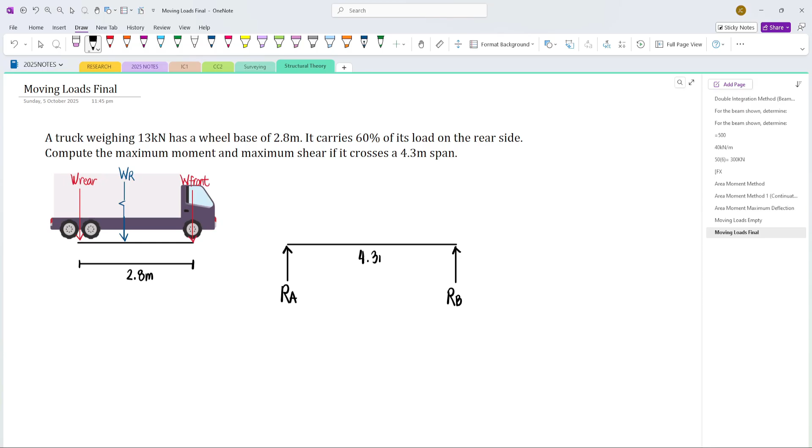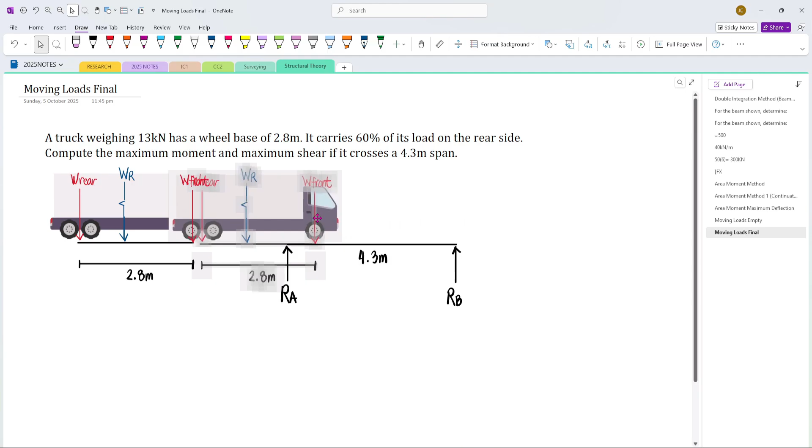So, as this truck passes along the span, mag-iiba yung maximum moments, yung shear saka maximum moment as it moves along the span. So we want to compute kung ano yung maximum or critical na moment if it crosses the span. Actually, yung concept nito is galing sa differential calculus. We have discussed it in another video, tried to solve moving loads problems using calculus, differential calculus, the concept of maxima minima.

So, yung binigay sa atin is the total weight of the truck, which is 13 kilonewtons. Itong 13 kilonewton load, this will essentially be the resultant. Lagay natin equals 13 kilonewtons. Then we have our rear load and the front load.

So 60% is carried by the rear side. So ano yung 60% ng 13? 0.6 times 13, we have 7.8. So on the rear side, we have 7.8 kilonewtons.

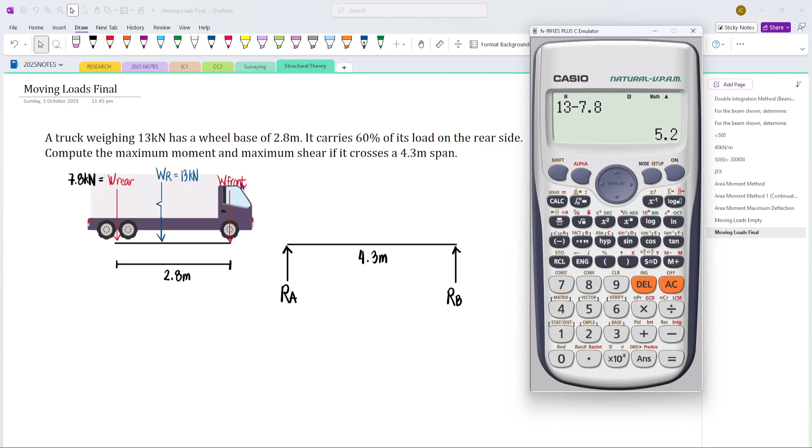So for the front side, it would be 40% lang, or essentially, 13 kN, the resultant, minus the rear load, yan yung maging load dyan sa front. So this is 5.2 lang, 5.2 kilonewtons.

Ayan, so at this point, hindi pa natin alam kung saan mag-a-act yung resultant load natin. But naturally, this will act closer to the rear side since mas malaki yung load dyan, 7.8 kesa sa front load. Again, 7.8 plus 5.2, yan lang yung 13 kN.

Yung binigay lang sa atin is initially ang resultant, so yung sinolve natin are the actual components. Ngayon, let's try to solve this distance, denoted as bar x. Now we can compute bar x using Varignon's theorem.

So resultant 13 multiplied by bar x is equal to, let's say ito yung reference line natin, reference line from the rear. So 13 times bar x equals the sum of the effects of the rear load and the front load.

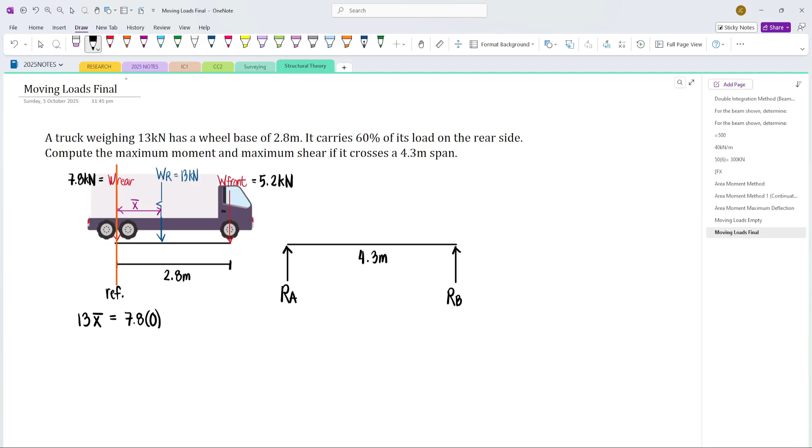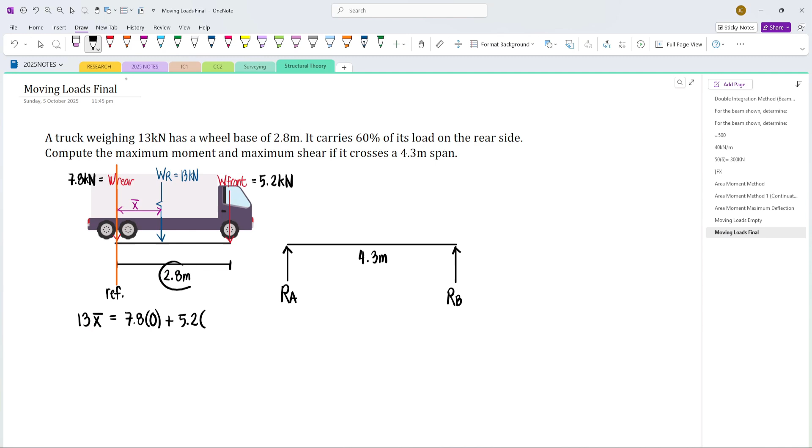So for the 7.8 kilonewton load, this is exactly at the reference point or the reference line, so this is to be multiplied by 0. Then for the 5.2 kN load, we have plus 5.2 times the distance going to the reference axis, which is 2.8 meters. So solving bar x, we have 1.12 meters.

So di ba sa concept natin, essentially dalawa yung maximum moments na mako-compute natin. First is the maximum moment under the 7.8 kilonewton load, and the second one is the maximum moment considering the front load. Now, where do we situate the loadings to cause the maximum moment about the rear load and the front load? Yung concept natin dyan from the derivation of moving loads is hahanapin natin yung gitna ng resultant and the load of interest. Then yung gitna na yan, ilalagay natin sa midspan ng beam.

So for example, if we want the maximum moment under the 7.8 kilonewton load, then draw tayo ng line dyan, tapos hahanapin natin yung gitna. So from the resultant and the 7.8 kilonewton load, the center is located dito.

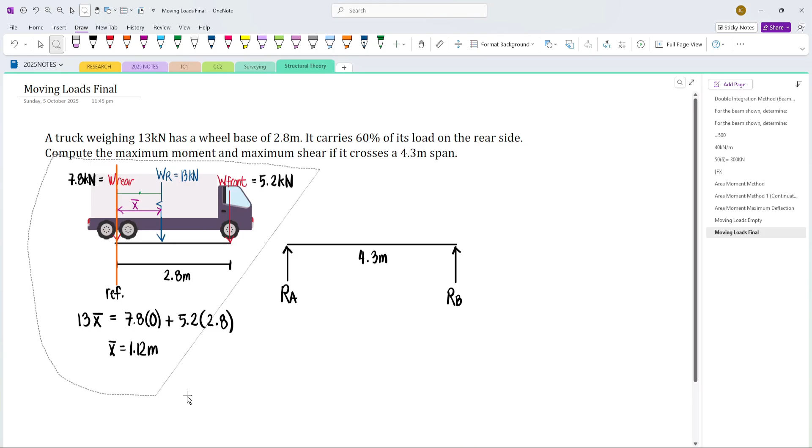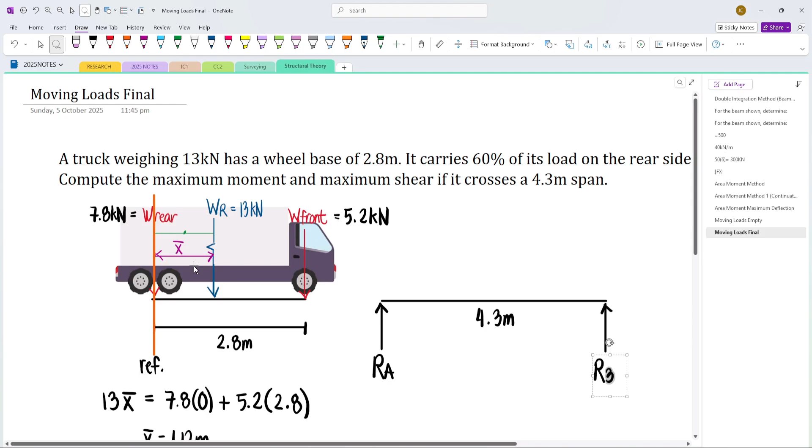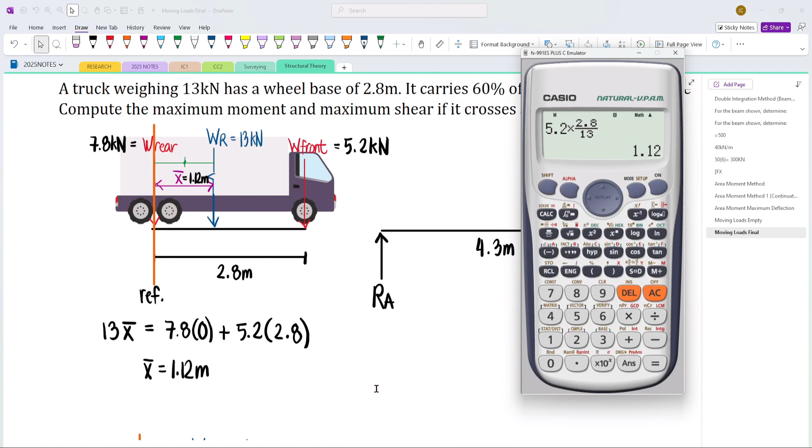So duplicate na lang natin yung figure natin para sa isang moment naman. So yung gitna na yan, ito, if bar x is 1.12 meters, then half of that distance would be equal to 1.12 over 2, which is divided by 2, we have 0.56. So 0.56 dito sa left side, then another 0.56 dyan sa right side.

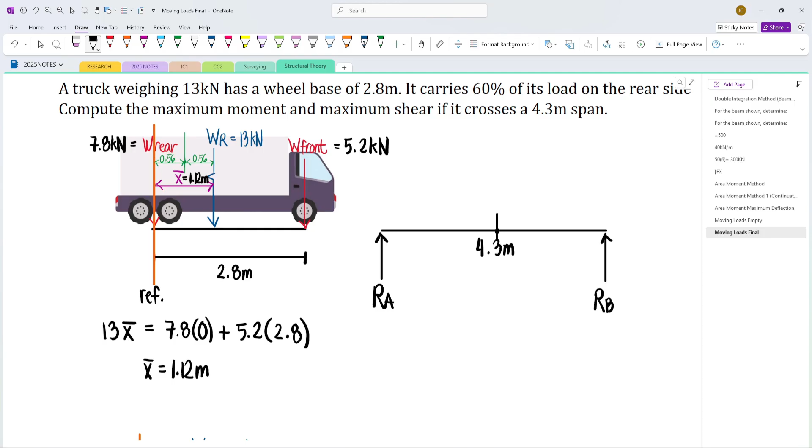Yung gitna na yan, ito, yung center ng resultant saka load of interest natin, ilalagay natin sa midspan ng beam. So, yung midspan ng beam na yan is located, let's say, dito. We will denote this as the center line, C sub L.

Ngayon, we have to make sure that the green line would be aligned to the center line of the beam. So, yung green line na yan, i-align natin sa center line. Ito. Ito yung center line.

Now, yung next natin gagawin is we have to determine if some of the loads would be outside the span, because if it's outside the span, then it won't affect our maximum moment since it will be supported somewhere beyond the supports of the bridge or the span. So, how can we determine if any of the loads would be outside the span?

Ito yung gagawin natin. Diba ito yung center line ng beam? Essentially, yan yung midspan niya. So, if we draw a line from the center line going to point B, then this distance will be half of 4.3 meters. Yung kalahati ng 4.3 is 2.15.

And then we have to compare this sa kung ano yung distance from this green line, yung center ng rear saka resultant, ayan, going to the front load. So, di ba, this is 0.56. Then, alam natin na yung wheelbase is 2.8 meters. Ito. 2.8 meters yan. So, essentially, 2.8 minus 0.56 would be this remaining distance.

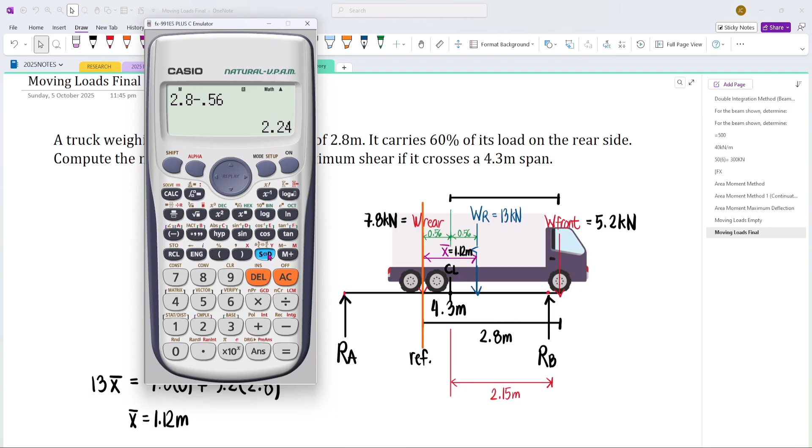So, we have 2.8 minus 0.56. This is equal to 2.24. 2.24 meters. Ayan. So, notice na tama yung figure natin.

Merong portion na lalagpas sa point B. Kasi 2.24 yan, ito naman 2.15. So, what does it mean? Merong excess distance, so yung front load is already outside the span. So, it won't affect the maximum moment, essentially.

So, sir, ano yung gagawin if this is the case? Now, if this is the case kasi, yung front load will not affect the reaction at A as well as the reaction at B since this is already outside the span. So, let's try now to compute the maximum moment considering this configuration.

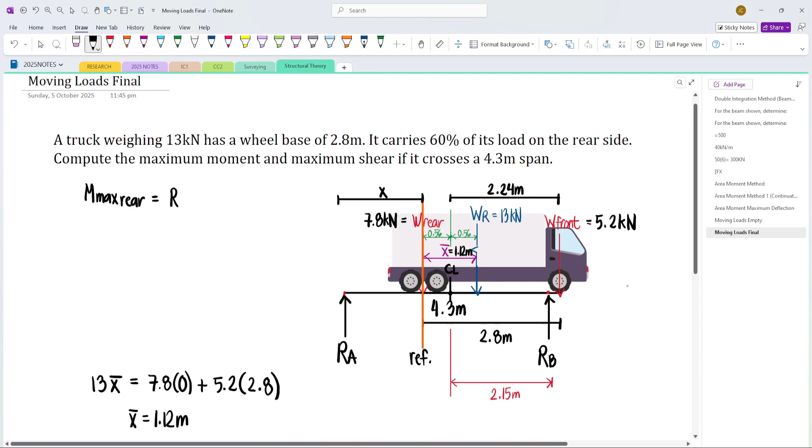Diba, to do that, to compute the maximum moment under the rear load, we have to compute RA first. Then, RA multiplied by this distance, let's say this is X. RA times X, yan yung moment under the rear load. So, we have RA multiplied by X. So, solve down natin yung RA considering this figure.

Summation of moments about point B tayo. Ayan. By the way, how did you assume, sir, na yung front load is outside?

Again, itong distance yung ginamit natin. But skinale ko kasi yung figure ng truck so that the distance will be accurate. Accurate talaga. So, kaya yung minove ko siya, automatic yung front load, lumagpas siya sa point B since nakascale yung figure natin. But if hindi siya nakascale, you have to check using the distance. Again, 2.24 exceeds 2.15 meters. So, that's how we can assure na yung front load is outside the span.

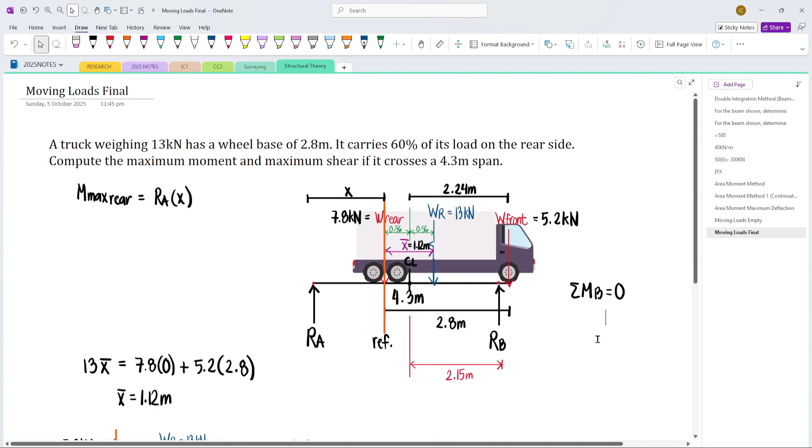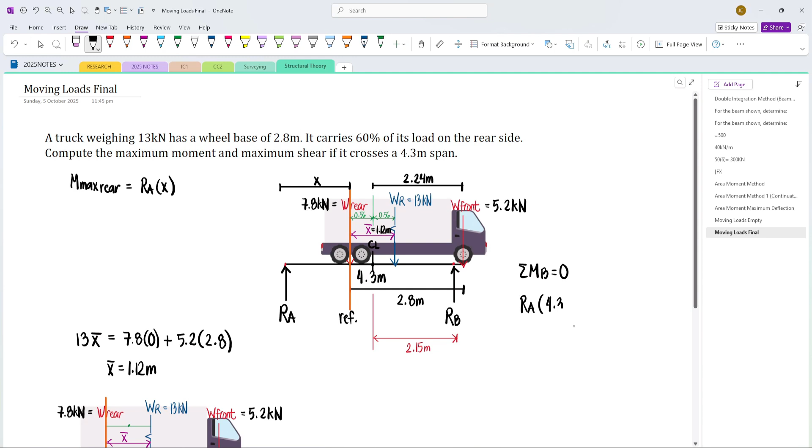So, moment tayo sa point B, we have RA multiplied by 4.3 meters. Ayan. Then, since yung front load is lagpas na siya sa span, we have to use the rear load sa calculation natin, yung rear load lang, 'di ba?

Nakasanayan natin na if merong two wheel loads, then we just use the resultant to solve the reactions. But in here, we cannot use the resultant since yung front load is again lagpas na sa point B natin. So considering only the rear load, we have minus 7.8. This will cause a counterclockwise rotation about point B.

Then ano yung distance na yan? Ito. From the rear load going to point B. 'Di ba? Yung distance na yan magiging 2.15 yan, yung kalahati ng span. So 2.15 plus 0.56, yan yung distance na yan. So 2.15 plus 0.56 is 2.71 meters.

Ayan. So times 2.71 equals 0. So yung value ng RA is equal to 4.3x minus 7.8 times 2.71. Then equate natin to 0. So solving RA, we have 4.9158.

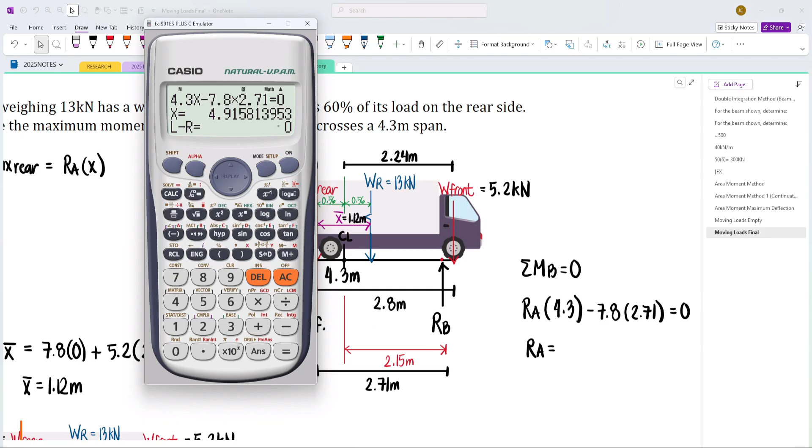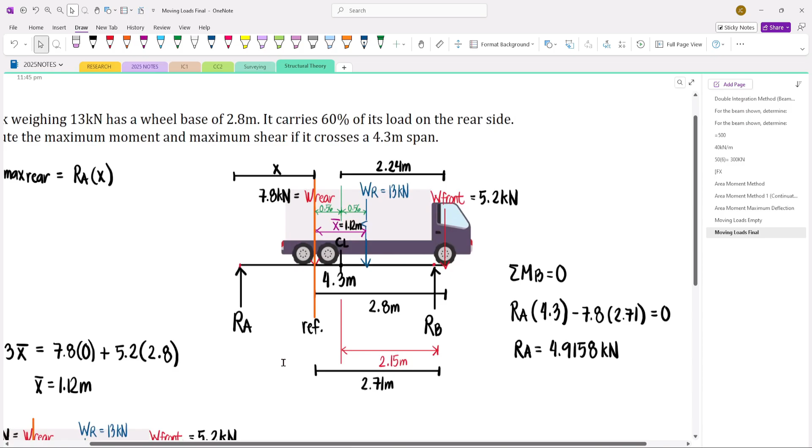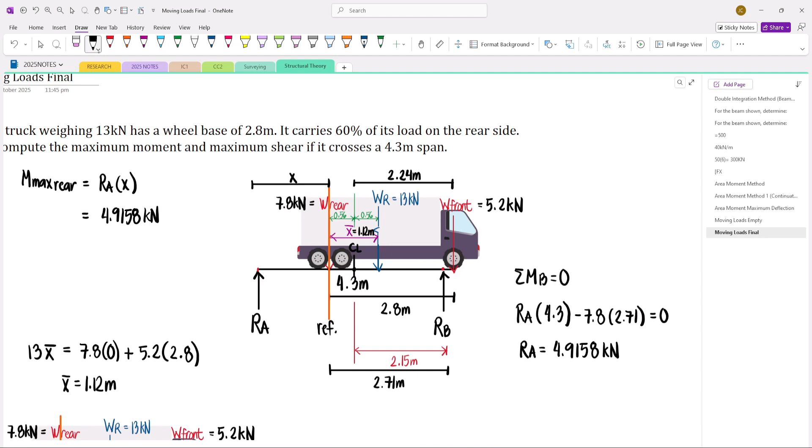This is kilonewtons. So solving the maximum moment under the rear load, considering this configuration lang, again, magbabago yung solution natin essentially. But this is just for the purpose of demonstration. So RA equals 4.9158 kN. Then this distance x is equal to, 'di ba, itong kalahati ng beam, if this is 2.15, then this is also 2.15.

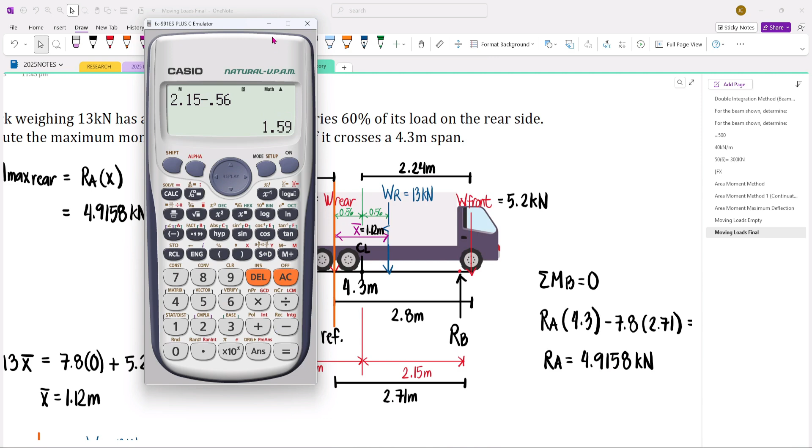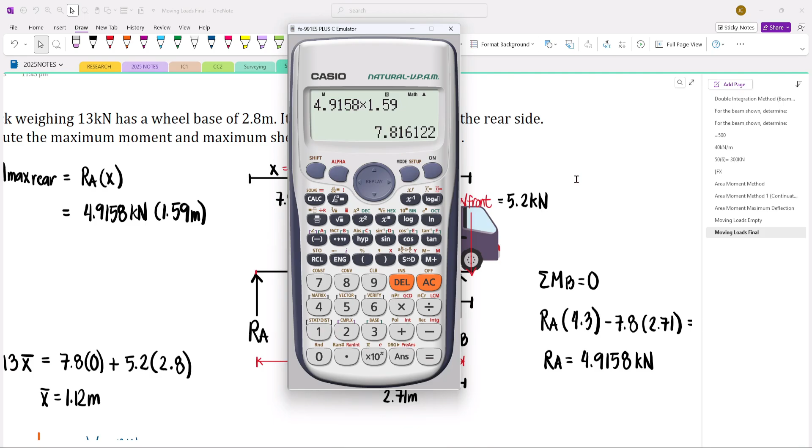So 2.15 minus 0.56, yan yung value ng x. So ano yan? Minus 0.56, we have 1.59. So times 1.59 meters. So this will give us 7.816 kilonewton meter.

Ayan. But again, this is the incorrect answer. Bakit? Since alam natin na yung front load is already outside the span, then this configuration will not cause the maximum moment under the rear load. So sir, ano yung gagawin if this is the case?

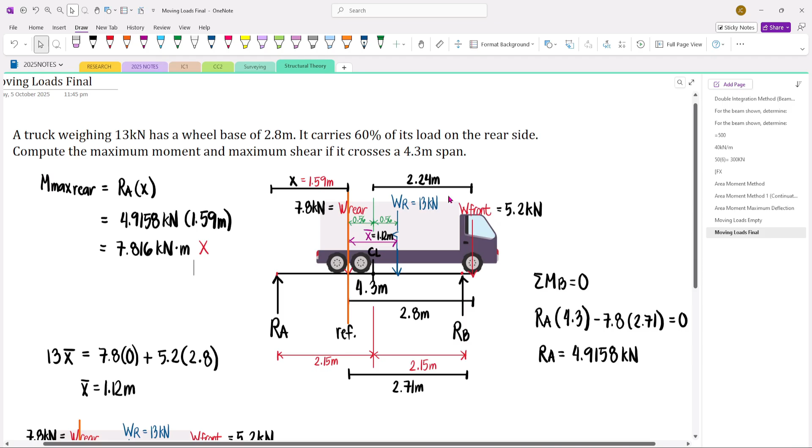Yung gagawin natin is, since yung front load already outside the span na siya, then we have to reduce the problem into one moving load na lang. Bale, ito yung mangyayari.

Copy natin to. Copy natin yan ulit. Then, ito yung truck natin.

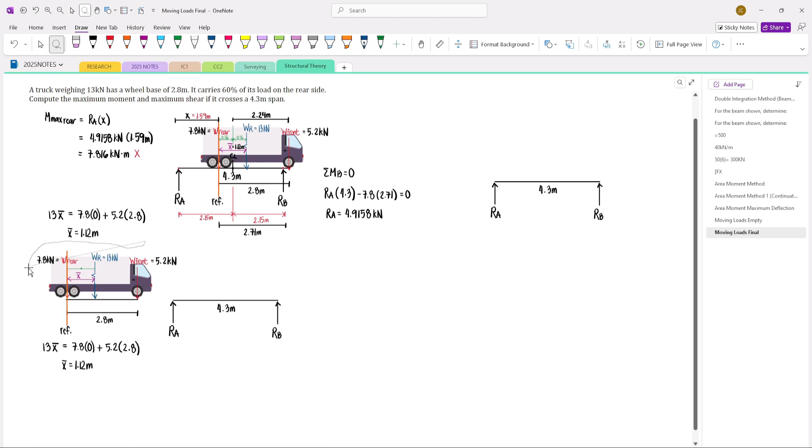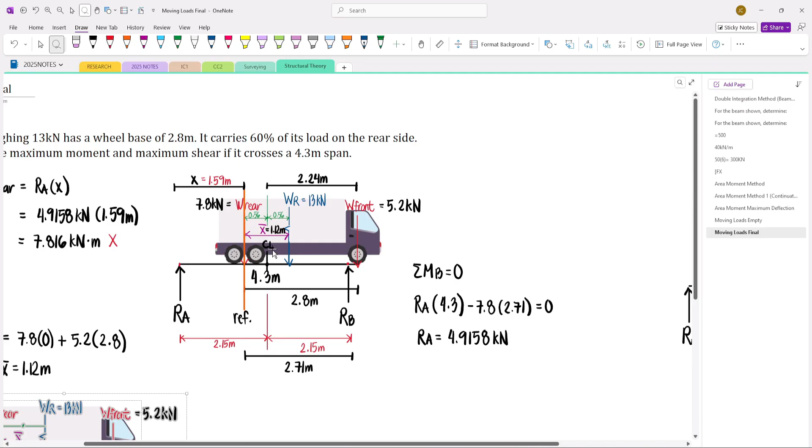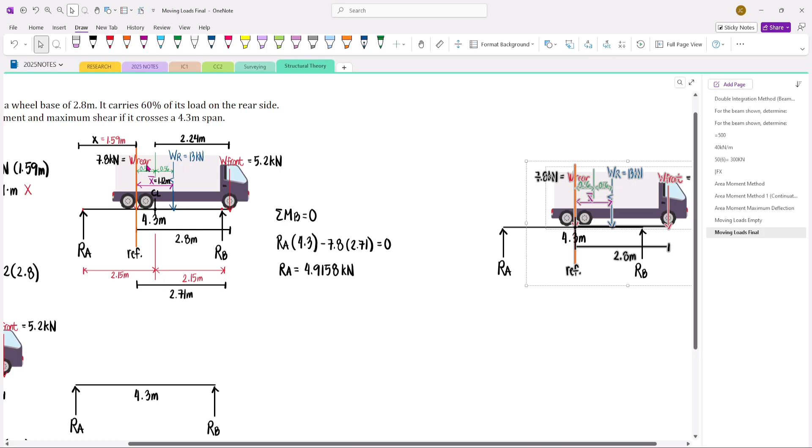Since alam natin na yung front load is already outside with this configuration, if the truck moves slightly to the right, then there will come a point na yung rear load is already aligned sa center line ng beam. So by our concept, yung gitna na yan, ilalagay natin sa center line ng beam. But again, this will not cause the maximum moment because if this moves forward, there will come a point na yung rear load is andyan talaga sa mid-span. Since we know na dito pa lang, the load is already outside the span, then we only consider the rear load.

So ano yung mangyari kapag ito na yung figure? Yung mangyari dyan, isang load na lang yung i-consider natin. So we have RA here, then we have also RB. Since this is outside the span, all the more it will be outside the span if the truck moves slightly to the right, then yung load na i-consider na lang natin is ito na lang, yung W rear.

So it will be located at the mid-span. So this is 2.15 meters, ito rin, 2.15 meters. So we have here 7.8 kilonewtons. So ngayon, yung maximum moment would be located andyan sa gitna, exactly.

Now, di ba meron tayong formula for concentrated loads located sa midspan. If this is P, then yung reactions natin would be P over 2 sa dalawang sides, kalahati ng P, since symmetrical yung placement ng load. So yung distance niyan is also half ng L over 2, yung dalawang distances. So the moment here is equal to moment at midspan, is P over 2 load times the moment arm, L over 2. So this would be equal to PL over 4.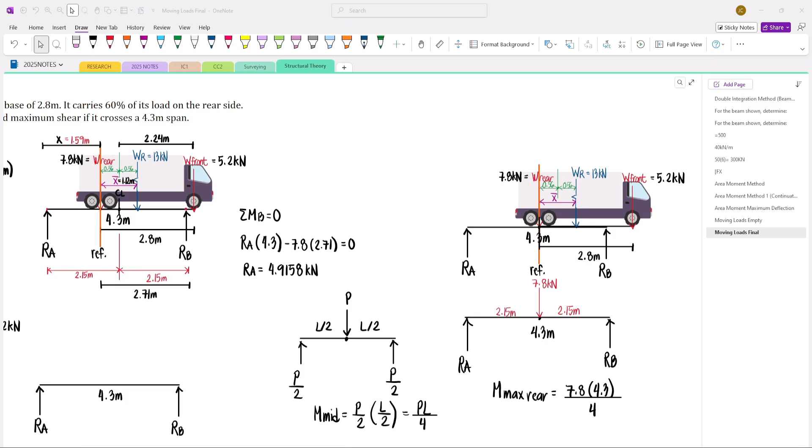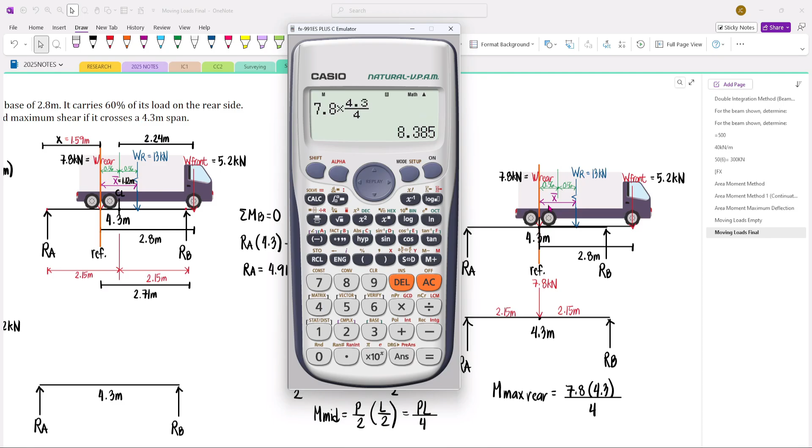So if you have a two moving loads problem, then merong isang load na outside the span, then we will reduce the problem into a one moving load problem, then we can readily apply this formula, PL over 4. So yung maximum moment pala under the 7.8 kilonewton load or the rear load na lang, M max rear, we have 7.8 times L. L is equal to 4.3 meters, then divided by 4. 7.8 times 4.3, then divide natin by 4, equals 8.385. Then this is in kilonewton meter.

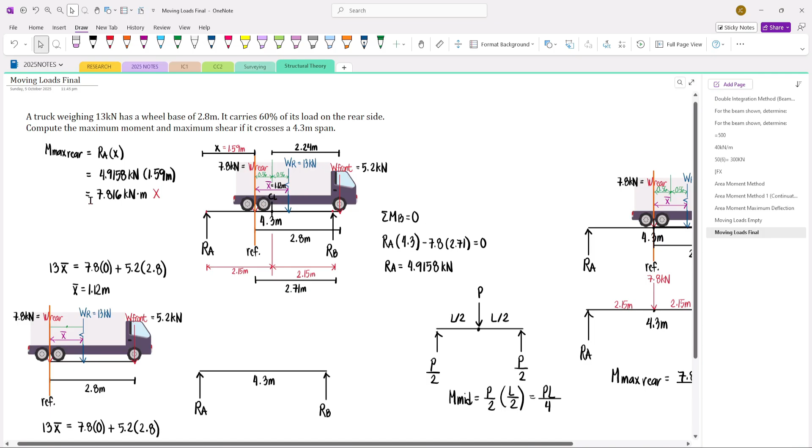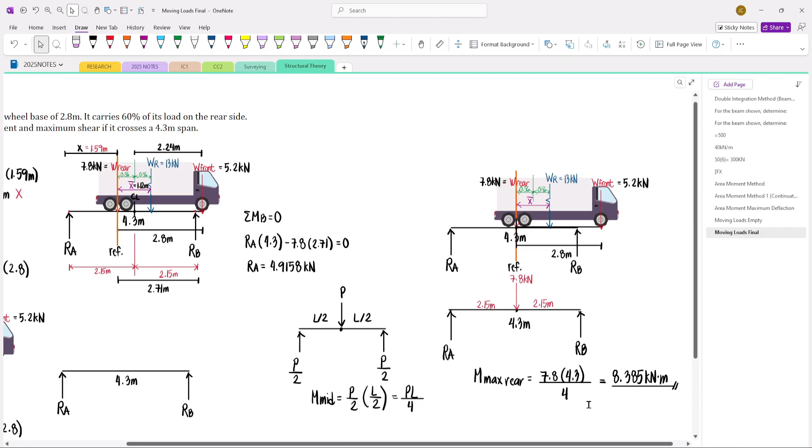So di ba merong slight difference? Kanina, yung na-solve natin 7.816 by our concept. But again, since using the concept, yung front load is outside the span, then we have to use this one. Ito yung maximum moment under the rear load. But we're still not sure if ito talaga yung maximum moment na i-consider natin, since we also have to compute the maximum moment considering the front load.

So for the front load naman, yung gagawin natin is hahanapin natin yung gitna ng resultant sa front load. Di ba yung bar X is 1.12 meters. So this remaining distance would be 2.8 minus 1.12, which is 1.68 meters yung buong distance niyan. Dito ko na lang ilalagay, so yung gitna niyan is located dito. Then half of 1.68 is equal to 0.84. So 0.84 dyan, tapos dito rin, 0.84.

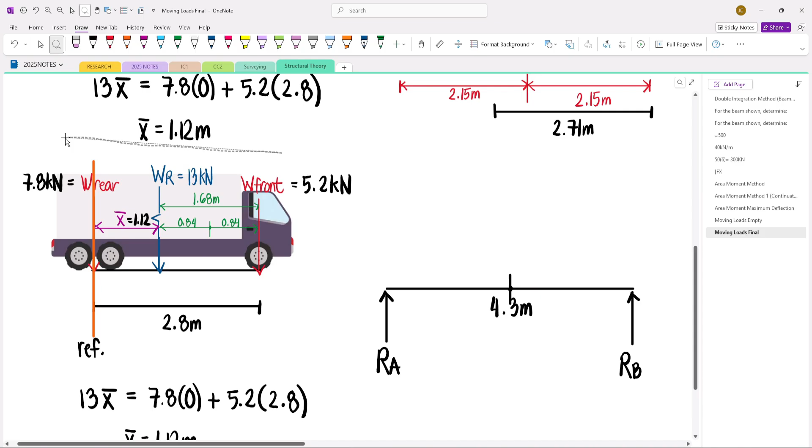So yung gagawin natin is establish natin yung center line ng beam or yung midspan niya. Tapos ilalagay natin yung center ng front load saka resultant load dyan sa midspan. So we would have this figure. Lagay natin yung gitna niya sa midspan. Andyan na yan sa center line, C sub L. So now we have to determine if meron bang load na lumagpas sa span ng beam o wala.

Again, ito yung RA. Now looking at our figure, since naka-scale yan, alam natin na yung rear load is just within the span since it is slightly to the right of point A. Ito kasi yung point A, location ng RA saka RB. But in order to determine without scaling, then kukunin natin yung distance. Diba yung kalahati ng 4.3 is ito.

Again, this is 2.15 meters. Let's try to calculate this distance. We have 1.12 plus 0.84 going to the center line. 1.12 plus 0.84 gives us 1.96. So going to the center line is only 1.96 meters, which is lesser than 2.15.

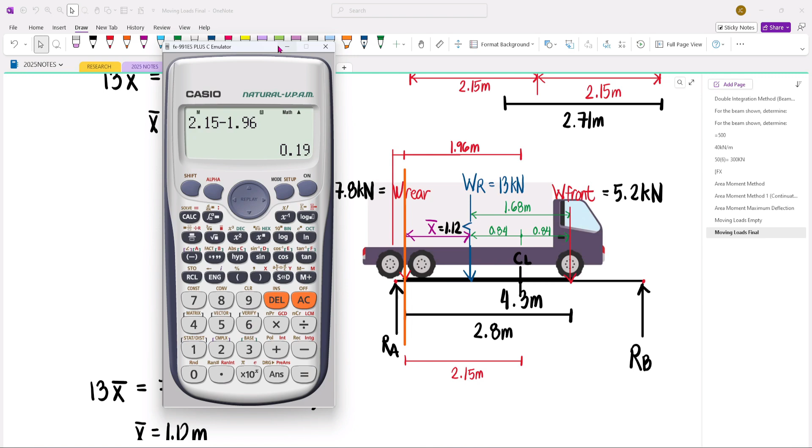But that's not necessary in our calculation, since to solve the maximum moment under the front load, it's better if we just take RB, then we will take moments from the right. So the maximum moment under the front load, Mmax front, would be equal to RB multiplied by this distance, the moment arm going to the front load.

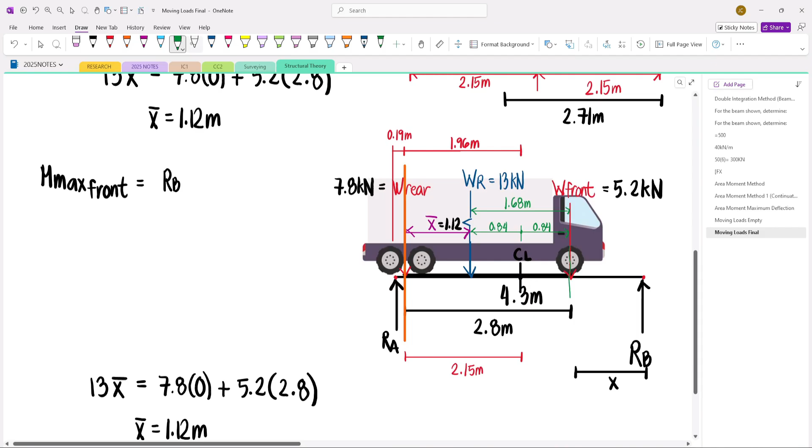Let's call it X. Now this is what you should remember: if you are cutting from the right, with the origin from the right, and we isolate that point, then the resulting internal moment would be clockwise. This is due to the positive effect, the moment under the front load. Why clockwise? For positive bending to occur, the applied moments at the ends would be clockwise on the left side, and counterclockwise on the right side, so that the bending orientation becomes like a smile.

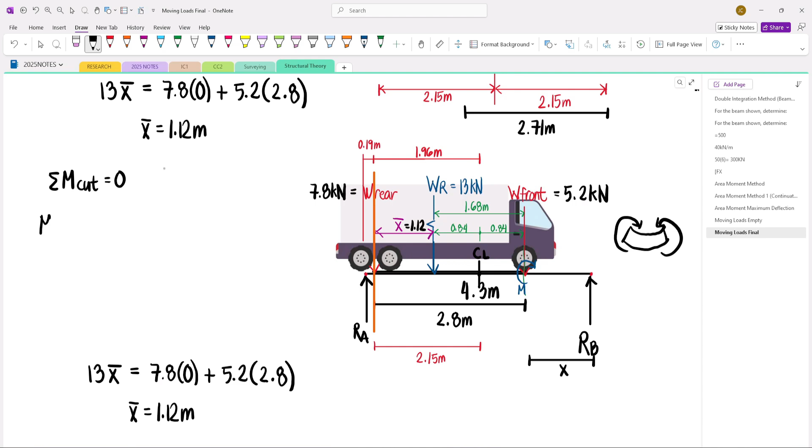So if our origin is from the right side, and we isolate what's on the left side, then the resulting moment is clockwise. So if we sum up, the Mmax front solution is like this: summation of moments about the cut equals 0. So the M there is Mmax front. I'll just place Mmax front, positive since clockwise is our assumption.

Then the RB, the rotation it will cause about this point, is counterclockwise, right? That's the direction. So minus RB multiplied by X. Notice that although this causes a counterclockwise moment about the point, once we move this to the other side of the equation, it becomes positive. So Mmax front will just be a positive value, not a negative value.

Now here, our cut is from the left, so the resulting moment is essentially counterclockwise. When counterclockwise, you can equate it right away: RA times X minus M. Since that's counterclockwise, you can move minus M to the other side of the equation, so it becomes positive.

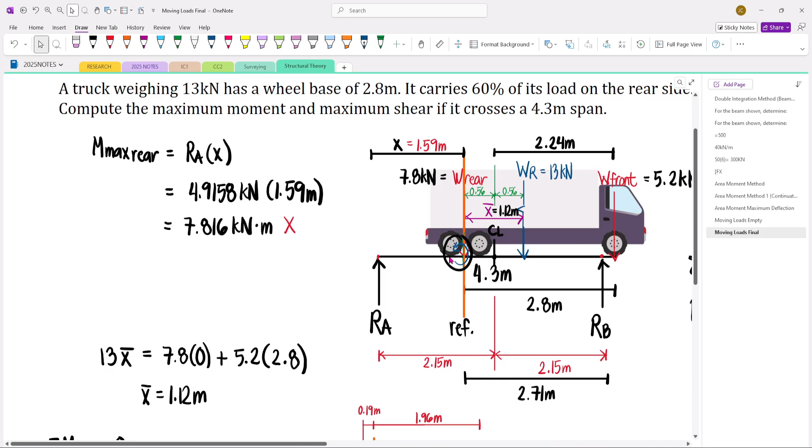So let's solve RB. Since all the loads are included, the rear load and the front load, to solve the reaction we will just use the resultant. We can use the resultant if all the loads are within the span. So to solve RB, let's take moments at point A equal to 0. We have 13 kN times its moment arm going to point A, which is this distance.

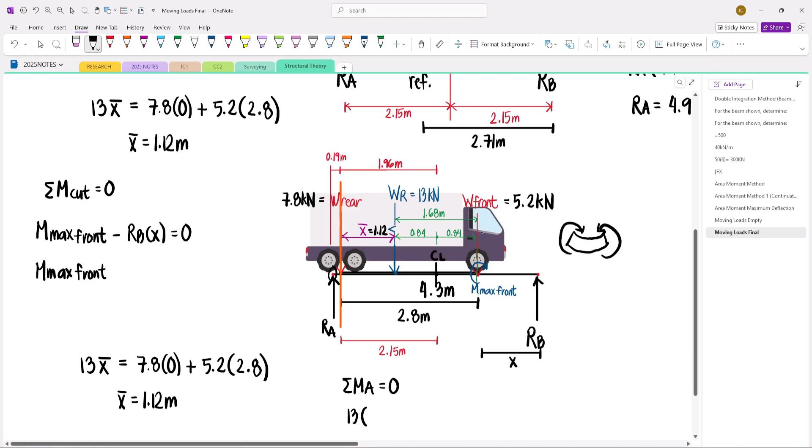So what is that distance? Is it this one? That's 2.15. Wait, there's something wrong with our figure. 2.15 is going to RA. Right, this is 2.15. Then this is the resultant load.

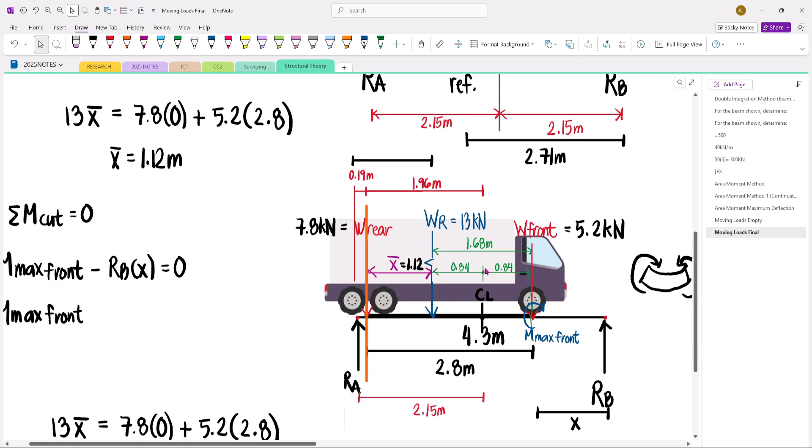So 2.15 minus 0.84, that's the moment arm going to point A. That's 2.15 minus this, 0.84. So 13 times 2.15 minus 0.84, that's a clockwise moment about point A.

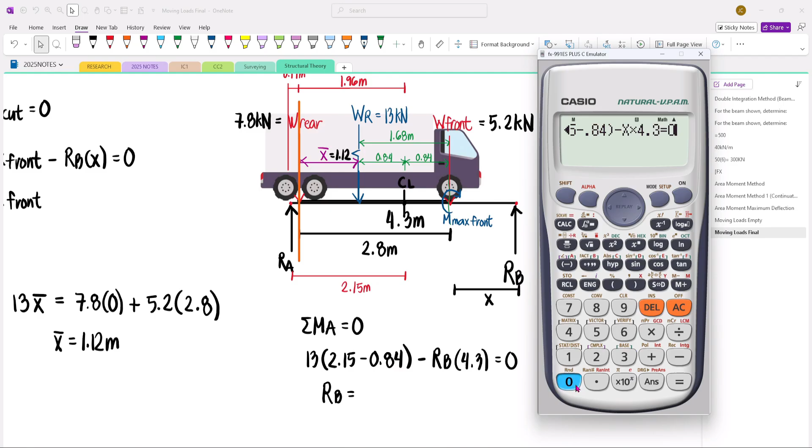Then we have RB minus RB times 4.3 meters going to point A. Then let's equate it to 0, so we can solve for RB. 13 times 2.15 minus 0.84 minus RB times 4.3 equals 0. So we would get 3.96, in kilonewtons.

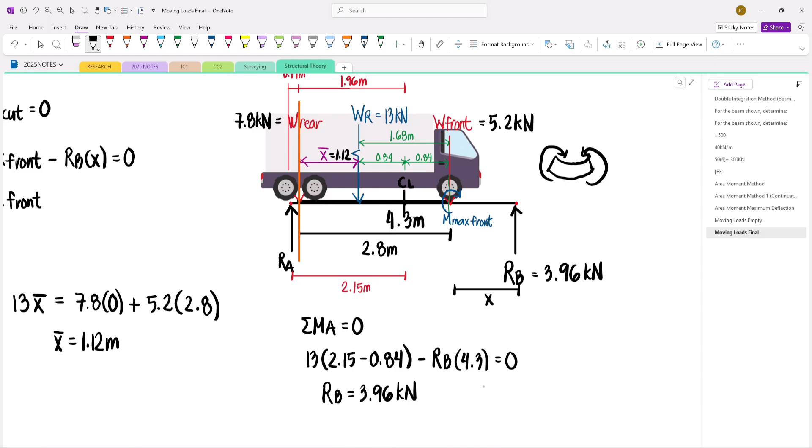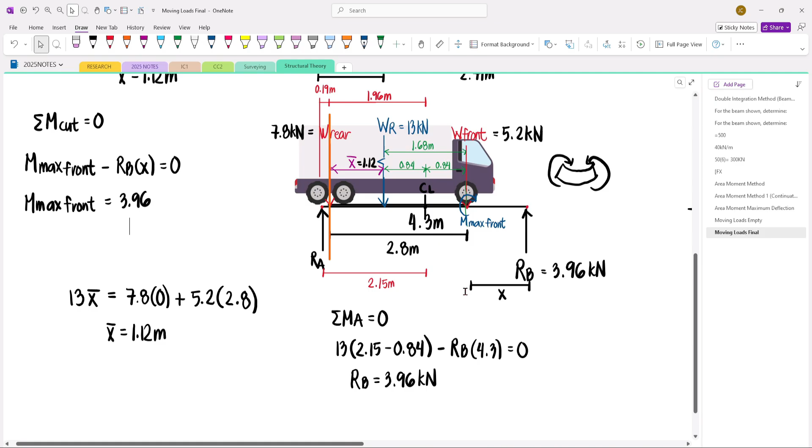So now let's take moments about the cut, just Mmax front. Let's move RB times X to the right side of the equation. RB is 3.96, then this distance X is equal to 2.15 minus 0.84, again this is also equal to 2.15. So 2.15 minus this, 0.84, that's the remaining distance X, so times 2.15 minus 0.84.

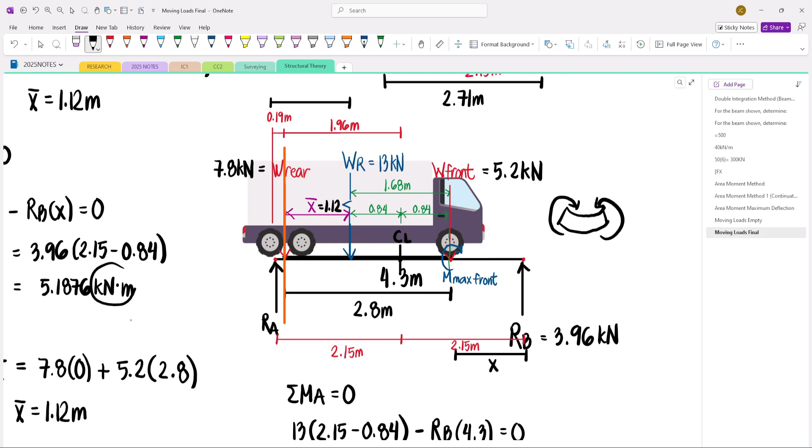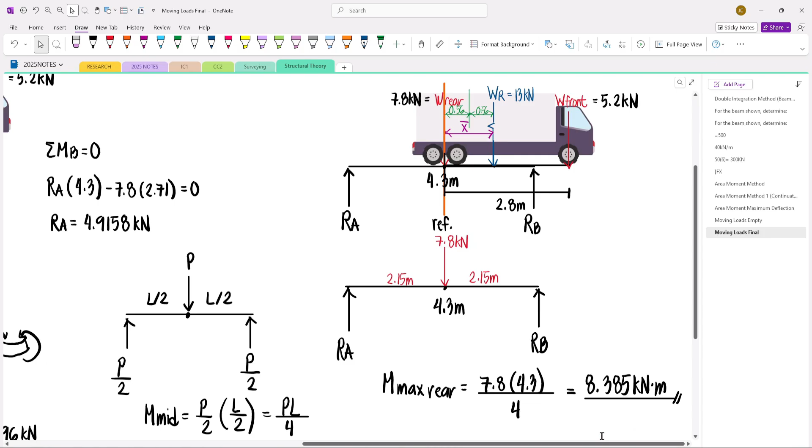So this will give us 5.1876, in kilonewton meter. So if we compare, the maximum moment under the 7.8 kilonewton load is 8.385. Under the front load, we have 5.1876. So the greater moment is 8.385, so that's our answer.

So again, in this problem, you cannot apply the formula PL minus PS times D squared divided by 4PL, which gives us the maximum moment. Why? We cannot apply this formula since, considering the larger load, the 7.8, the front load is outside the span. So whatever value this is, it won't give us 8.385. This is a key consideration.

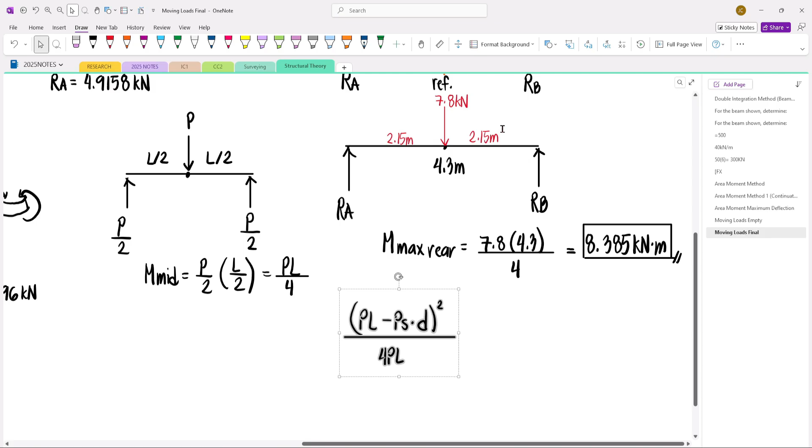That's why, when solving problems involving moving loads, it's better to understand the concept. But again, in the board exam, you can just readily apply this formula since the spans used are large, usually 25 meters, and the wheelbase is usually just 4.3 meters, so all the loads fit. But since in undergrad we want to learn the concepts and basics, we learn how to solve this using the concept of maxima-minima and the generalized figures. So that's our answer for the maximum moment.

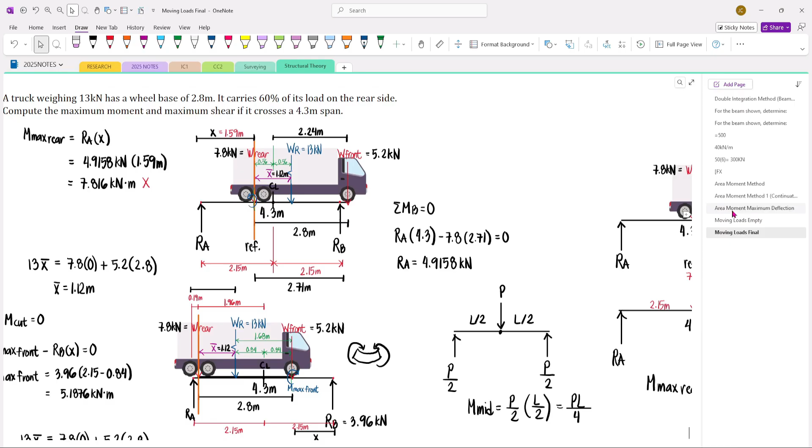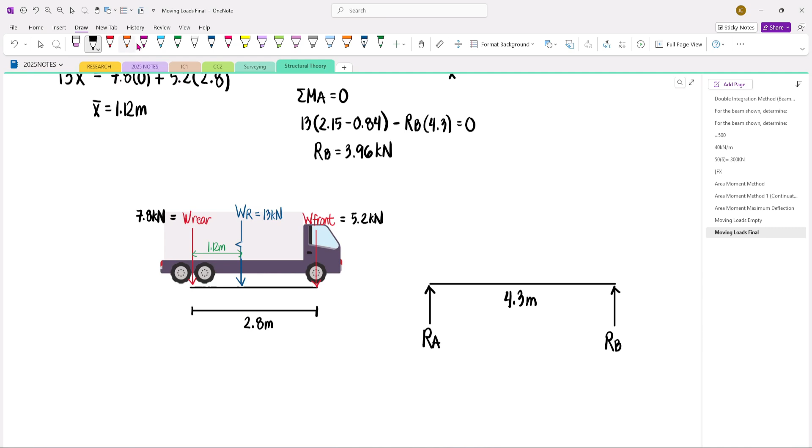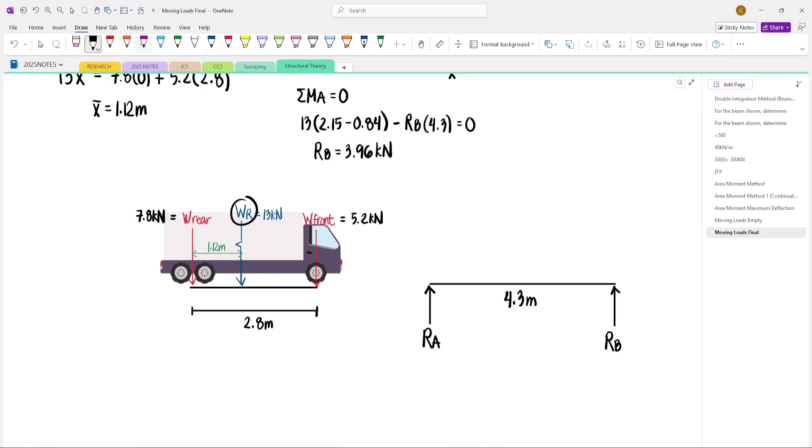Next, if we want to calculate the maximum shear, here's what we do. We find where the extreme load closest to the resultant is. Now what does extreme mean? An extreme load is the one at the very end. So for two-wheel loads, we have a rear load and a front load. In our figure, the resultant is closer to the rear load, since that's 1.12, while the other side is 1.68. So once you identify the closest extreme load from the resultant load, that load will be placed exactly at the support.

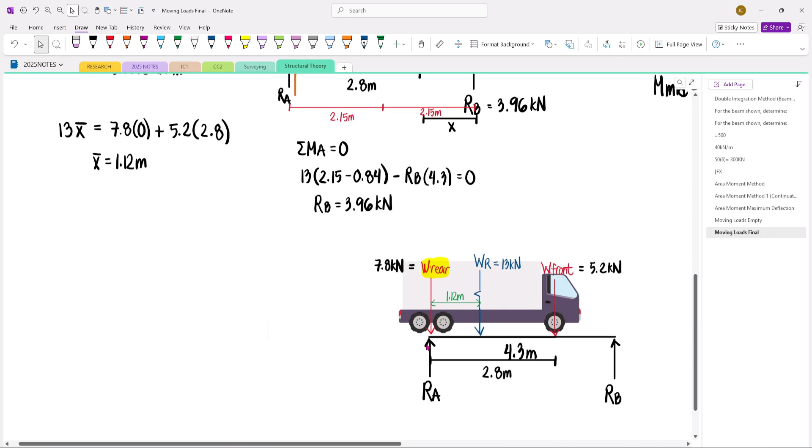This load is on the left side, meaning we place it at the left support. That's what happens. Then, once we place the load exactly at the support, to solve the maximum shear, we just compute the reaction where the extreme load was placed. So to solve RA, we can sum up moments about point B.

We will just use the resultant since all our loads fit within the span. So once we take moments about point B, we get this distance. I hope we agree that this remaining distance would be 4.3 minus 1.12. So, taking moments about point B, we have RA times a moment arm of 4.3 meters going to point B, minus 13 kN, using the resultant, times a moment arm of 4.3 minus 1.12. We equate this to zero and solve for RA.

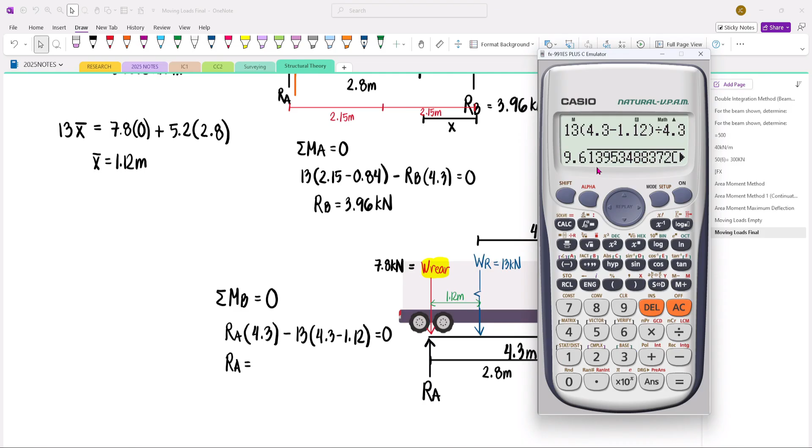So RA equals 13 times 4.3 minus 1.12, divided by 4.3. So we get 9.614 kilonewtons.

So sir, what if there are 3 moving loads? Let's say three moving loads, then we have the following figure. Let's say we have three loads, and the resultant is somewhere here, with a distance going to the left and also a distance going to the right end. These are the extreme loads, these two. Notice in our figure that the resultant is clearly closer to the right load. So what we do is place that right load at the support.

But what if the resultant is here instead? Let's say the resultant is at this point. What happens then is the resultant is closer to the load at the left extreme end. So that load is what you place at the support. Same as what happened before, since the resultant is closer to the left extreme side, that load is the one we place exactly at the support.

But again, this is at a differential distance x from point A, because when you draw the shear and moment diagram, the W rear and RA are essentially counteracting loads, downward and upward. So the shear at that point would not be equal to this value, the 9.614. To demonstrate this, we can model the beam here.

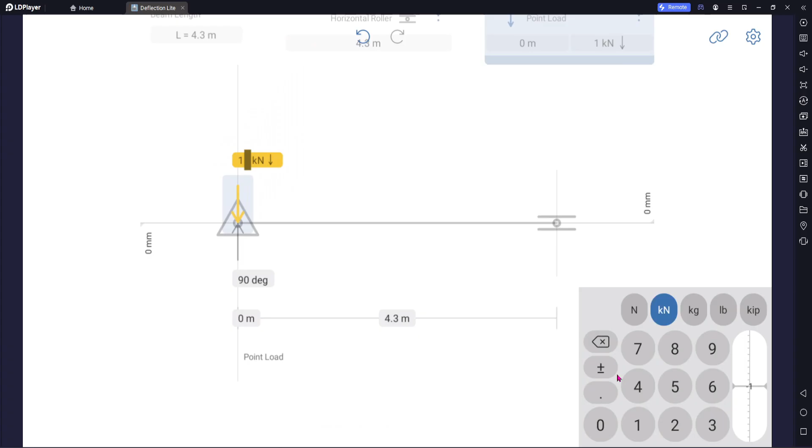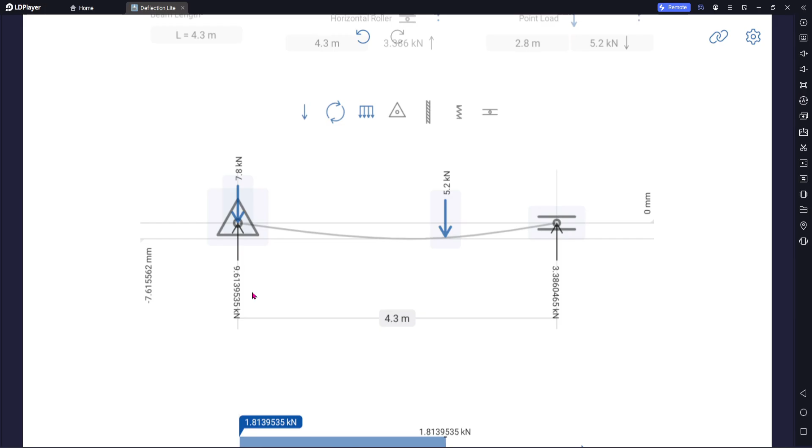So we have a span of 4.3 meters, simply supported. When we place the load, this is 7.8, at 2.8 meters from the left. This other one is 5.2 kN. So our resulting reaction is 9.6139, which is what we got earlier, 9.614. But if you try to look at the shear diagram, it will just be 1.8139.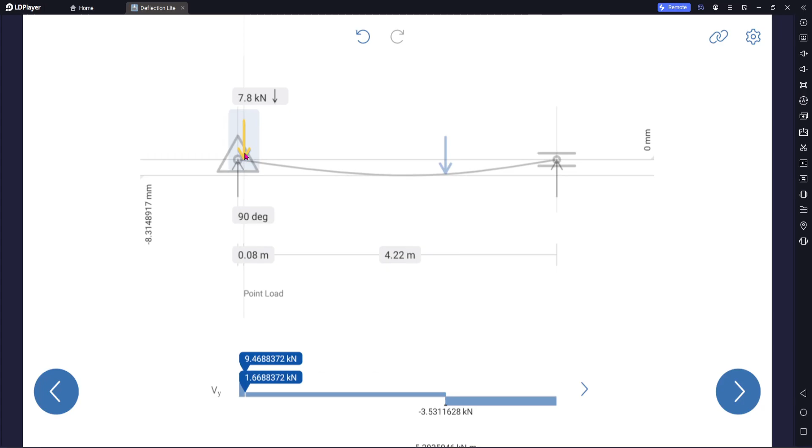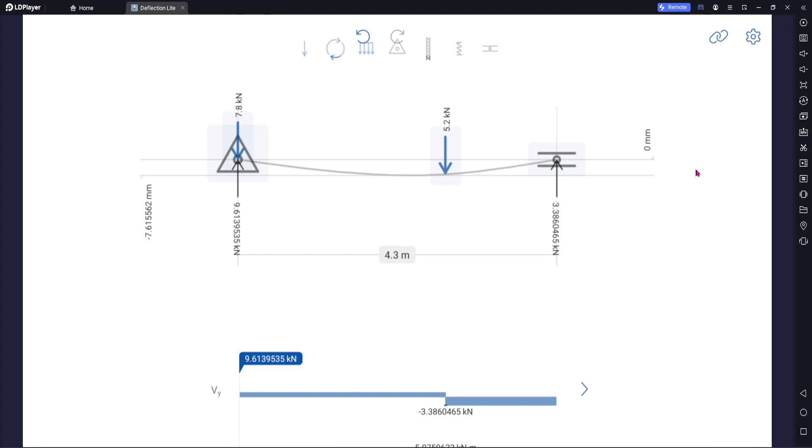Since the 7.8 and 9.613 are opposing directions, essentially what we're trying to do is place the 7.8 at a differential distance x from the left support, let's say 0.000001, a value very close to zero. Once you do that, the maximum shear becomes 9.613 right at the support itself. So what we end up doing is assuming that whatever the support reaction is at the left end, that's also the maximum shear essentially.